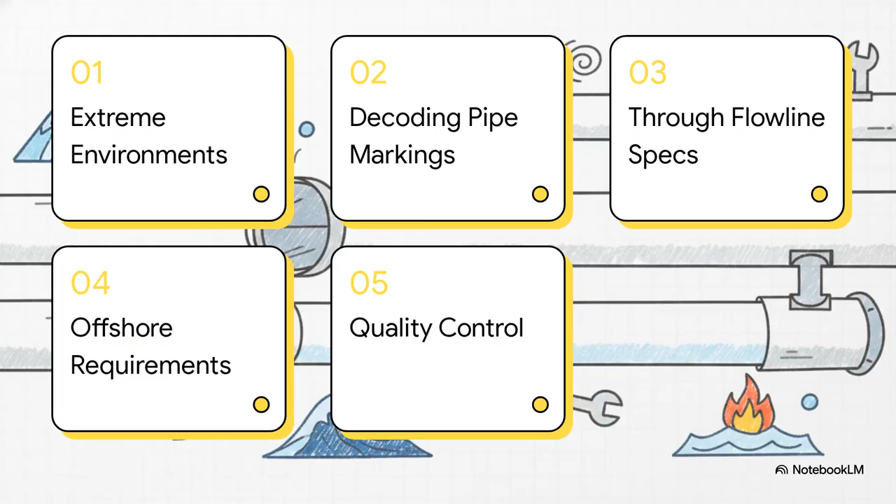All right, let's dive into this spec. We're going to cover testing for extreme environments, how to decode those complex pipe markings, through flowline specs, offshore requirements, and finally, quality control and tolerances.

Starting off with Part 1, testing for extreme environments, specifically looking at Annex H, which deals with sour service. Now, when pipes transport sour gas, the chemical attack they face is just relentless. Our main enemies here are hydrogen-induced cracking and sulfide stress cracking. To fight this off, these grueling 720-hour tests are absolutely mandatory. Just imagine putting stressed steel into a bath saturated with chemically pure hydrogen sulfide for 30 days straight. It's intense, but it ensures hydrogen atoms don't blister the steel and snap the pipe under pressure.

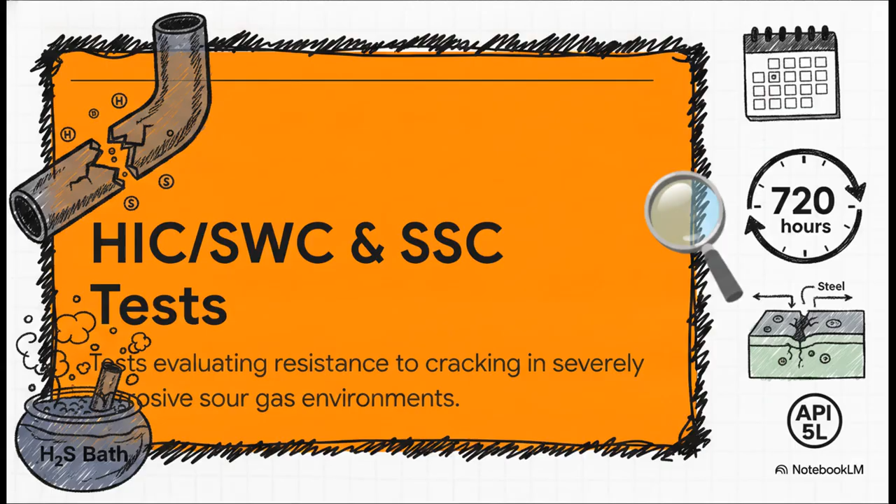Take a look at the tiny X marks across these weld cross-sections here. They mark exactly where Vickers hardness tests have to happen. Why does this matter? Well, if a specific zone is too hard, it actually becomes brittle and way more susceptible to cracking in those sour environments. So hardness cannot exceed strict limits, and the testing has to hit the parent metal, the heat-affected zone, and dead center on the weld itself.

And for high-frequency welded, or HFW pipes, the testing grid expands even further. They have to maintain a really strict 0.75 millimeter distance from the fusion line, checking just 1/10 of an inch from the surface, and spacing those indentations precisely 1 millimeter apart. This kind of microscopic scrutiny is there to guarantee the welding process hasn't accidentally created a brittle Achilles heel.

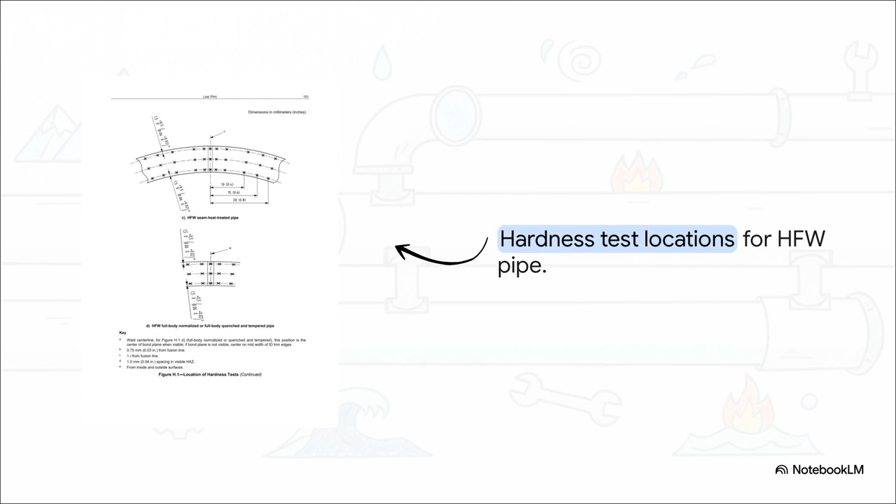Moving on to Part 2, decoding API pipe markings, or basically knowing your sour class. Out in the field, you have to know a pipe's armor at a glance. Those sour class designators, Class A, L, and F, tell us exactly which test solutions the pipe actually survived. For instance, if you see X52 MSA, that S proudly declares it's fit for sour service, and the A means it passed some incredibly severe testing. See an O, that means it's rated for offshore use. Basically, this standardized alphabet soup is a critical safety lifeline for engineers.

Let's hit Part 3. Through flowline pipe specs, which covers Annex I and TFL requirements. So in modern operations, maintenance tools are often pumped physically through the pipe itself. To guarantee these tools don't get snagged, through flowline or TFL pipes face this brutal 3-step drift test. They literally pass a large, precision-machined metal cylinder called a drift mandrel through the entire 40-foot pipe while making sure there's absolutely no sagging. If that cylinder catches for even a microsecond, the pipe fails, no exceptions.

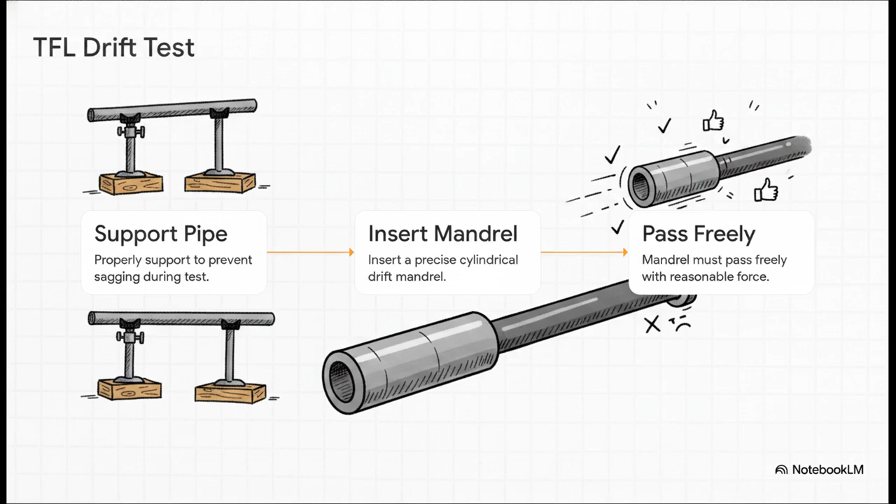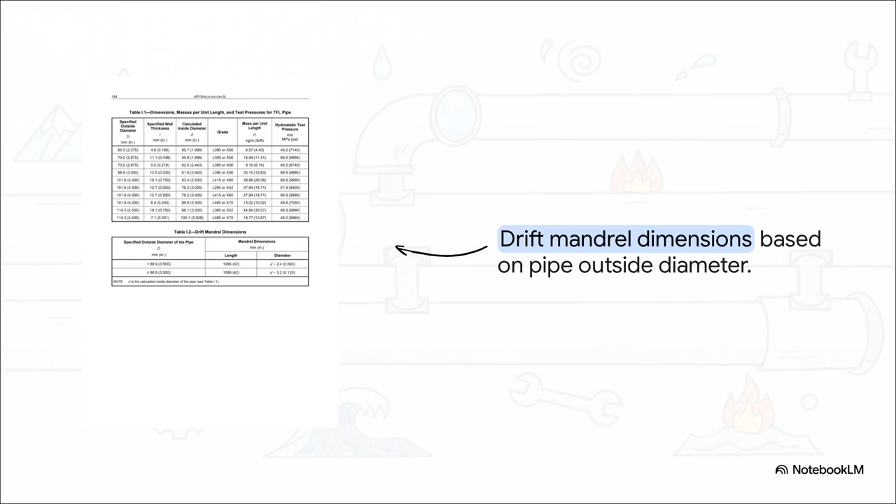And the dimensions of this mandrel? Incredibly unforgiving. If a pipe has an inside diameter of D, the mandrel is D minus just 2.4 or 3.2 millimeters. That is an astonishingly tight clearance for heavy industrial steel. It proves that the internal geometry has to be manufactured to near absolute perfection.

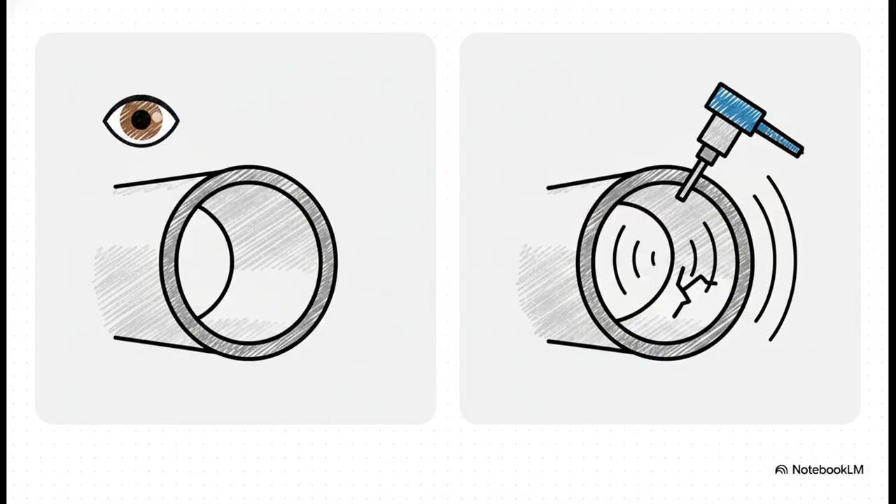Now for Part 4, offshore service requirements. This is Annex J, all about surviving the seafloor. Laying pipe in deep water subjects the steel to immense bending stresses and crushing hydrostatic pressures. To survive this, Annex J demands a massive escalation in testing. Standard visual checks? Tossed out. Instead, they require comprehensive, full-body ultrasonic and magnetic particle inspections. What they're doing is actively hunting for microscopic laminations inside the steel that could pull apart when bent on a laying vessel.

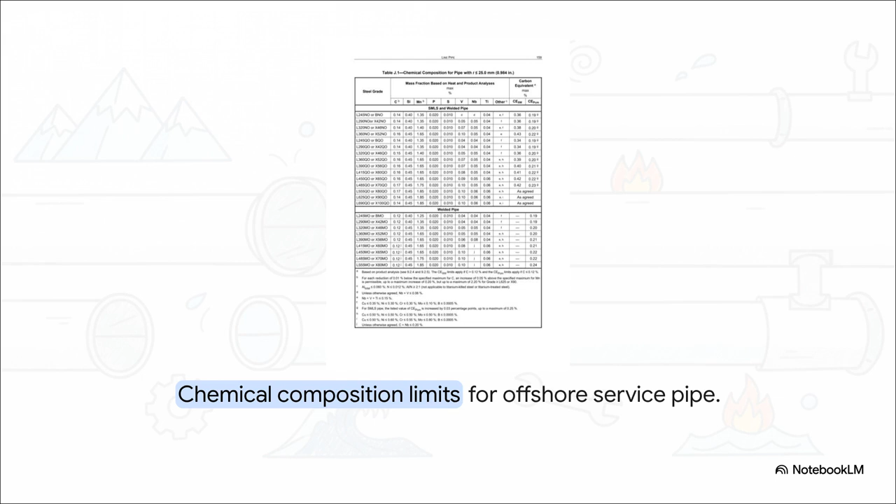Check out how strictly carbon equivalents and elements like titanium are controlled here. We aren't just melting down random scrap metal. A high carbon equivalent makes steel harder, sure, but it also makes it much harder to weld successfully out on a pitching ocean barge. By capping these elements, we ensure the steel remains incredibly tough, yet ductile enough to work with.

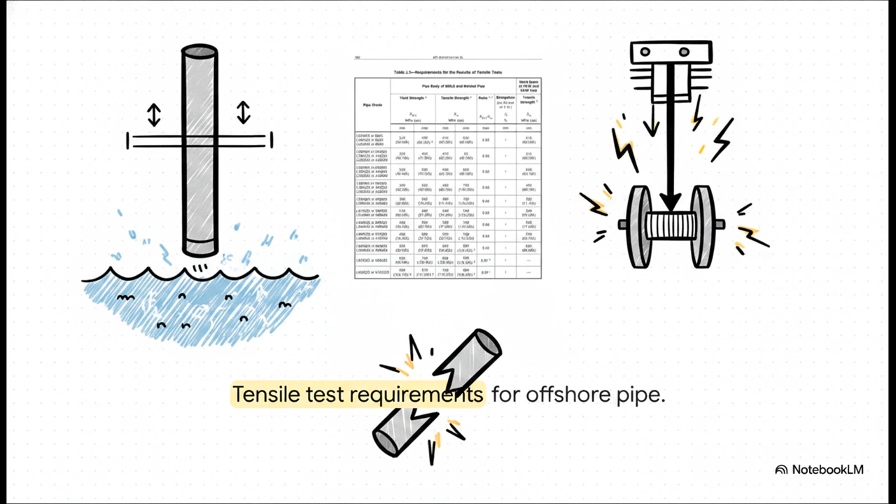Also, notice the rigid caps on yield strength. Standard grades often just care about hitting a minimum strength, but offshore demands a strict maximum too. Think about it. If a pipe is unexpectedly overstrong, it won't bend properly around the reeling ship during installation, which can lead to sudden, catastrophic snapping. In this environment, predictability is just as vital as raw strength.

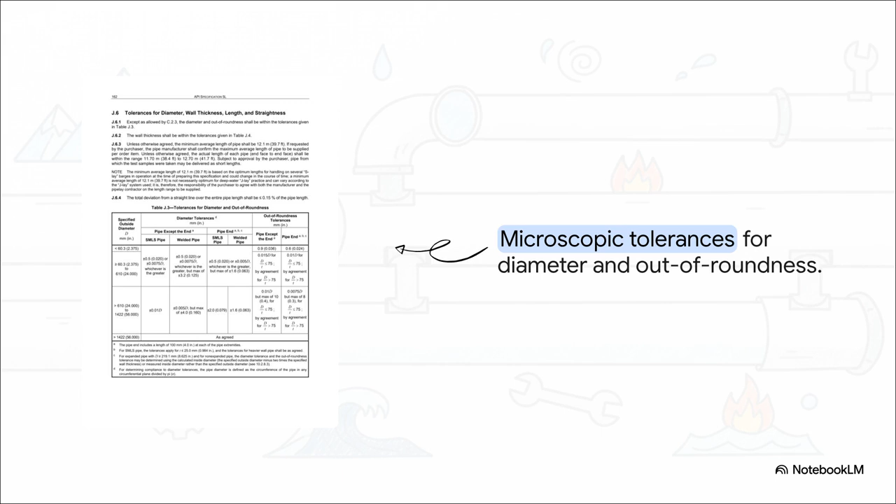Bringing us to our final section, Part 5, Quality Control and Tolerances, or what we call the margins of safety. To consistently manufacture tens of thousands of miles of perfect pipe, the physical out-of-roundness tolerances have to be microscopic. For many offshore pipes, the deviation at the pipe end cannot exceed 1.6 millimeters. When you're welding two massive pipes together on a pitching barge in the North Sea, if the ends aren't perfectly circular, the welds simply won't align. And an imperfect weld, that is exactly where a pipeline bursts.

This relentless quality control means mandatory tensile and impact testing for every single batch. A factory can't just test the first pipe of the day and hope the rest turn out okay. Depending on the diameter, 1 in every 50 or 100 pipes is pulled off the line and physically destroyed in testing. This crazy high frequency guarantees that even the slightest drift in manufacturing is caught immediately.

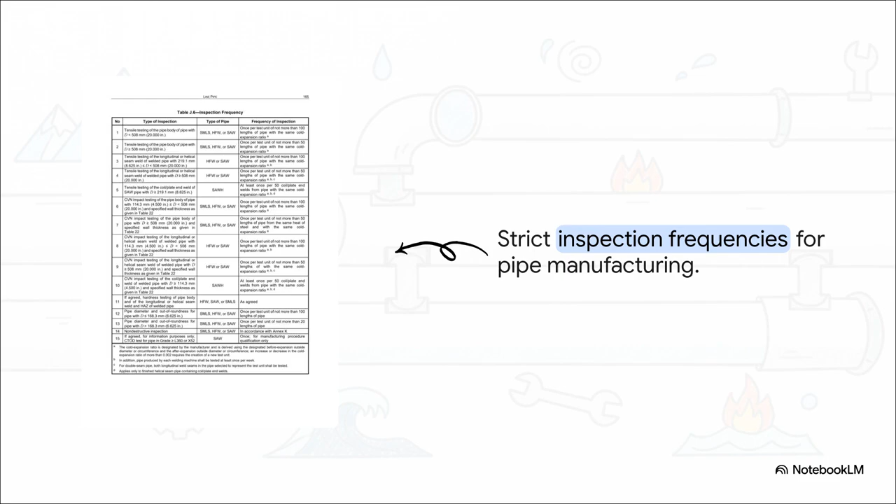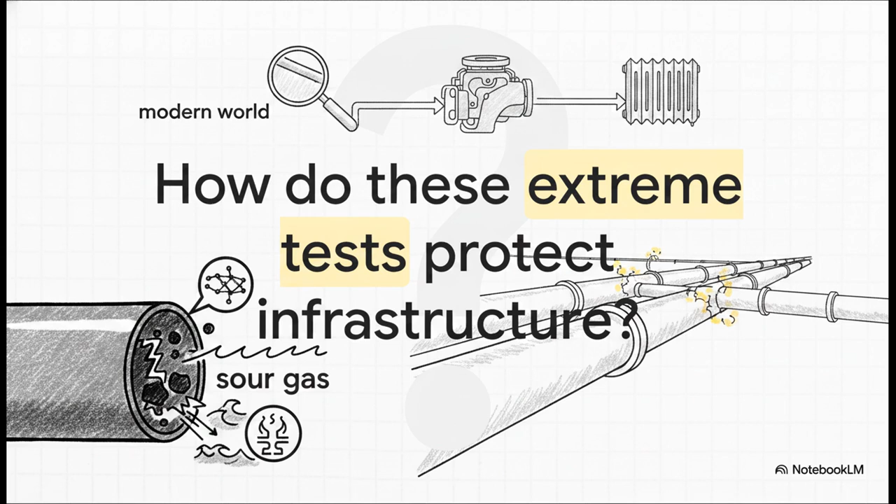So, knowing all the grueling tests and microscopic tolerances we've covered in this explainer, it leaves you wondering, how heavily does our entire modern world rely on the unseen perfection of these steel cylinders? Next time you turn on a heater, think about the thousands of miles of certified steel buried beneath us, passing microscopic inspections to hold back the ocean and resist toxic gas. If a 2-millimeter deviation spells disaster, what other invisible engineering miracles are keeping our world spinning right now?